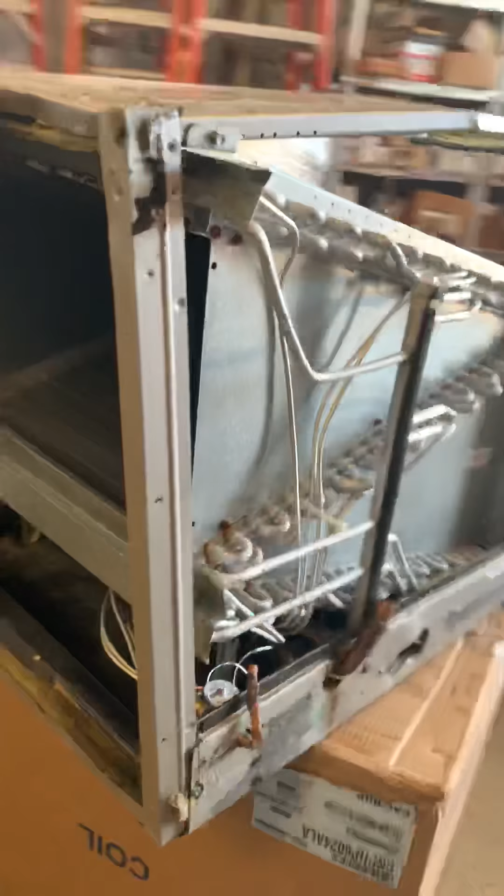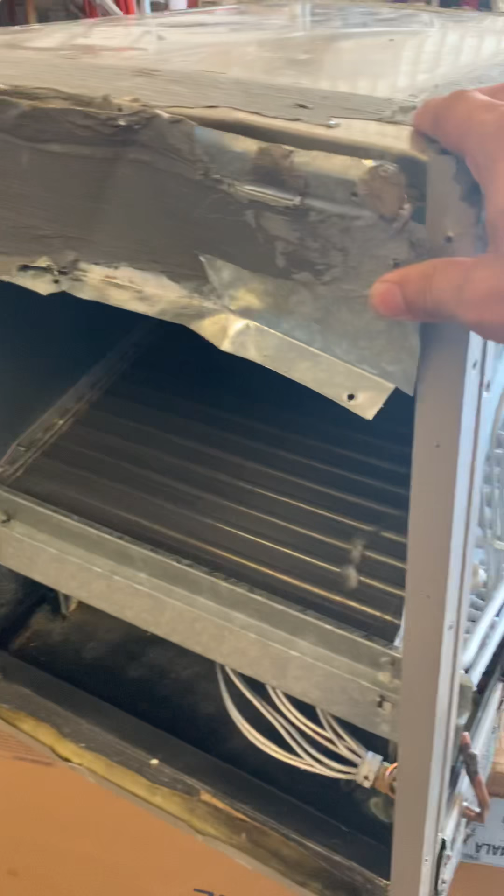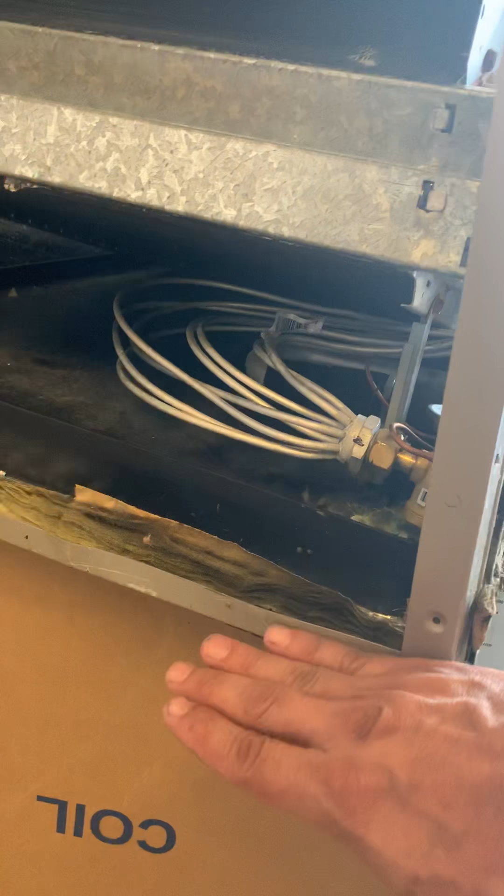This is the backside. So typically what you would see is this would be the evaporator coil, and then right here would be the furnace. And we got to looking, and the top part of this coil is blanked off because the cabinet for the coil is actually bigger than the cabinet for the furnace, and so they lined up the bottom of the furnace with the bottom of the coil, blanked off all the extra space, right?

And so in most cases, I gotta be honest, look, I was an installer for a very, very long time, and you wouldn't think that that would be a big thing. I mean, the airflow is still gonna go across the evaporator coil. And so my tech took a little bit of time, we did some digging, and here's what we found. So this is actually the installation guide.

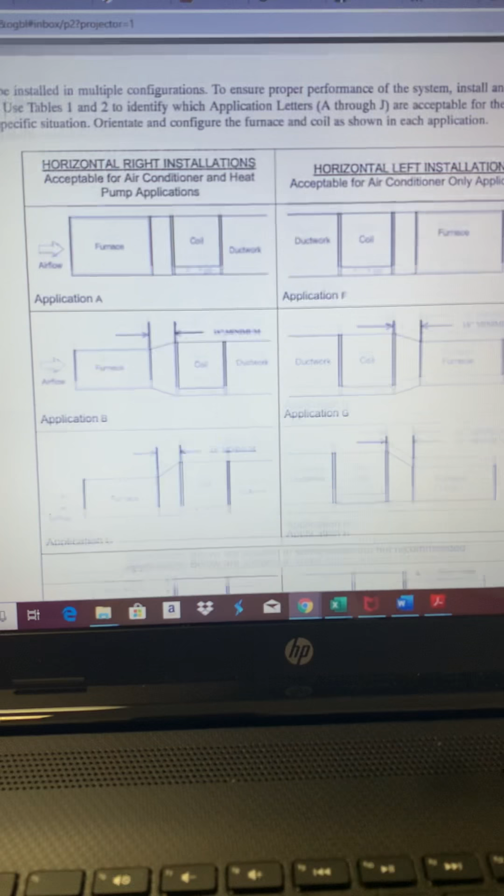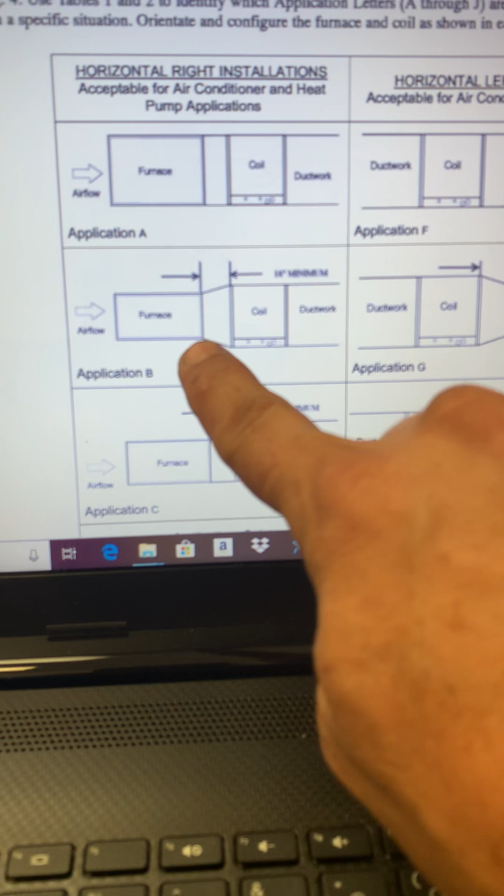You see here, they want the furnace with a transition to match up the same size as the coil, or you can use a transition that lengthens it out, right? That kind of goes at an angle to match. Same thing on the left side. Or you can match it up to the bottom and then go upwards. Same thing if it's laying this way.

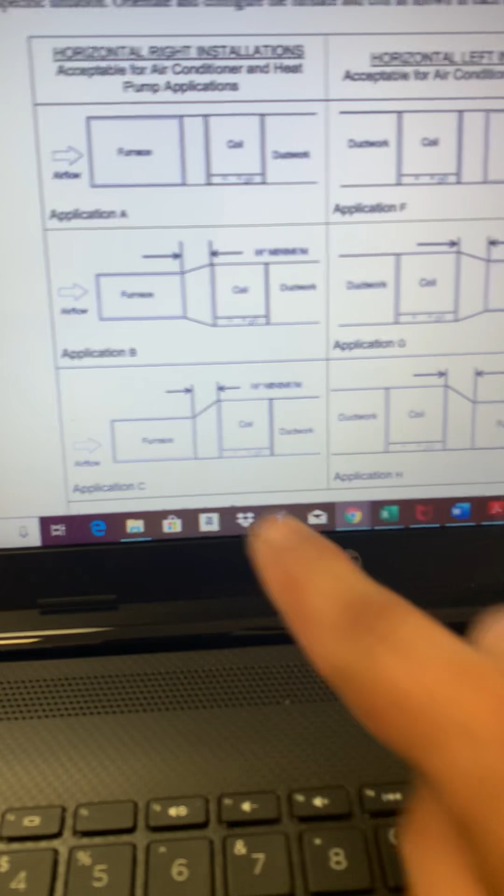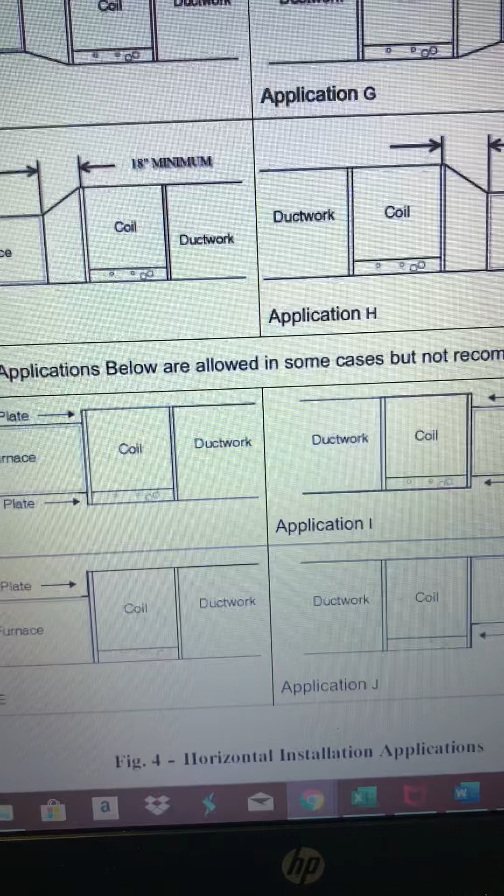Here's what it actually says. I know that it's going to be hard to read. Let me see. Applications below are allowed in some cases, but not recommended. And if you look right here, furnace, coil, filler plate, right? That's what we were just seeing out there.

It's not recommended. Now, anytime a manufacturer says that, never does a manufacturer want to say, don't ever do it this way. They don't ever tell you that. What they'll say is what that word just said, not recommended. So we went back to that homeowner's house, did exactly what needed to be done, hung the system so that it matched the airflow properly, solved all the issues.

It takes a lot of work, a lot of effort. I think we were at this homeowner's home like 5-6 times before we finally came across, oh, it's not actually something super mechanical. It's something that happened on the first day of the life of the system. And I've said that before on many occasions too. The most important day of the life of your AC system is the day it's installed.

It's not really the manufacturer or who made it or what the brand name is. It's the installers that put it in that are going to decide whether or not that unit's going to last you for 15 or 20 years, or if it's going to start going bad at 8 or 10 years. So anyway, props to the tech, did his homework.